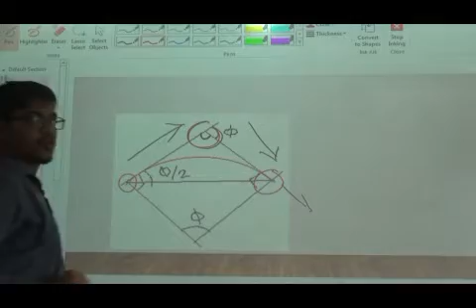Here we have some knowledge about the curve, some terms. Where these two lines meet, this point, I will change the color, this point is called the horizontal intersection. The starting point and the ending point of the curve are called tangent points. This is the starting point of the curve, this is the ending point of the curve. Both are called tangent points.

We were moving in this direction, and we diverted to this direction. How much we divert? This angle is called the deflection angle. We have to measure this with our theodolite instrument in the field, or, when we provide the curve, our design section will tell us how much this angle will be.

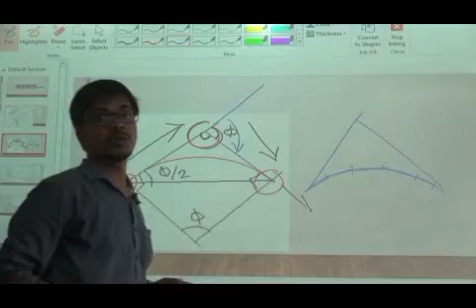Another thing we have to know is that when you provide a curve by the one theodolite, or Rankine's method, or the two theodolite method, the curve will be divided into many small chords like this. This is the smooth curve as per design, but in the field we have to provide various small chords, because when all the small chords are joined, that will be one full curve. So here we come to the first calculation.

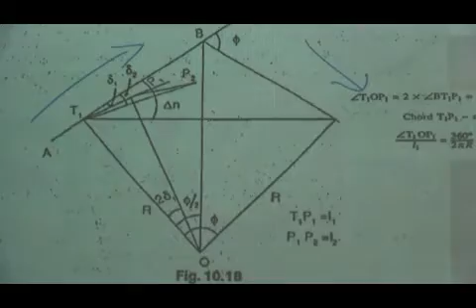We can see this is our first direction. We diverted because of some obstacle there, natural or human-made. How much we diverted? After that, we have to put one smooth curve there. But how to put it? Here comes the calculation. Another thing we have to know: we can see this picture. This is a quadrilateral, or Chaturbhuj.

If we draw this full circle, this is the center of the full circle. This one is the radius, and these two are tangents. Radius and tangent meet at a 90-degree angle, and this is a quadrilateral. The summation of the 4 interior angles is always 360 degrees, and these two are already 90, that means 180 degrees. So the summation of the remaining two angles is 180 degrees.

If we extend this line, this is a straight line. This angle is phi. So how much will this be? This will be 180 minus phi, and this angle is also phi. So this angle and this angle will be equal, as per the conclusion.

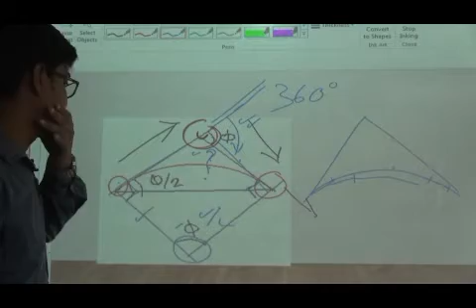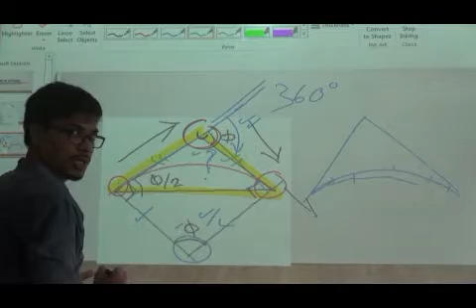And if we see this triangle, see, these are the tangents, and as per the property of the circle, we know that from one point both tangents are equal. From an outside point of the curve, these tangents are equal. So the lengths of these two tangents are equal, so both these angles will be equal, okay.

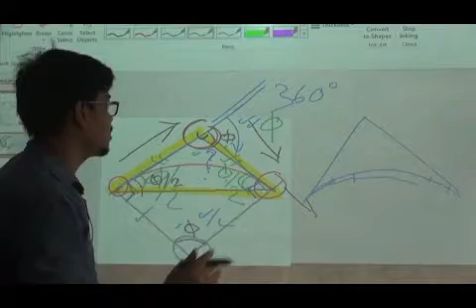And we know, as per the property of the triangle, the summation of this and this is equal to this angle. So if this angle is phi, both these angles will be phi by 2. This angle phi by 2, this angle phi by 2. And just before, we got the conclusion that this angle is equal, so this angle is also phi.

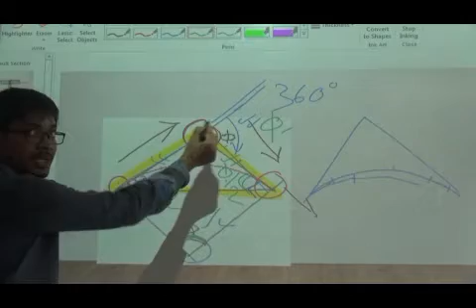So we can get the conclusion that whatever angle is made between the tangent and chord will be half of the angle made at the center, or reversely we can say that this angle is twice the angle made between the tangent and the long chord or any chord, okay.

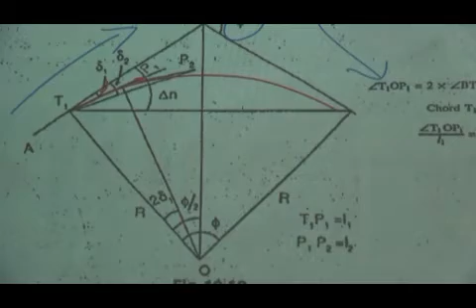So come here, suppose this one will be our curve, okay. This is the first point on the curve. We select the length L from here, and the first angle is delta 1. So how much angle will this chord make at the center? This will be 2 delta 1. So the chord makes an angle delta 1 with the tangent, and the same chord makes an angle at the center twice that, that means 2 delta, okay.

So from the circle we can say that the circumference of the circle is 2 pi r, that means the full circumference. And how much angle does this make at the center? This is 360 degrees. So if we zoom in on this chord and this arc, the difference in length between these two is very negligible. So we will assume that both distances are equal, okay.

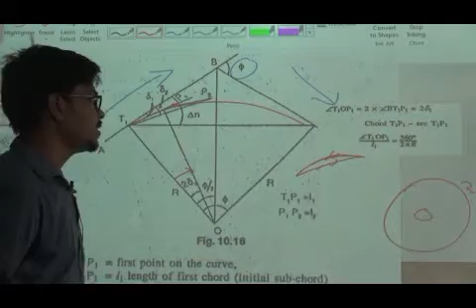So the ratio of the first chord or first arc, from here to the first point of the curve, to the angle made at the center, and the ratio of the full circle to the angle made at the center will be the same. So from here we can get the conclusion that angle TOP1 and L1, the length of the chord, equals 360 degrees divided by 2 pi r. This is the ratio, and these both are equal.

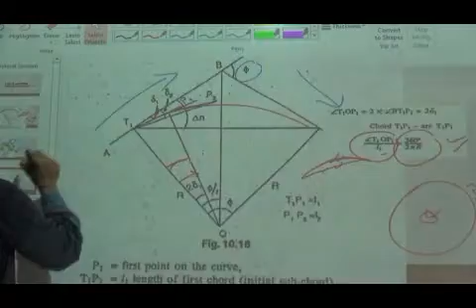So from the equation we get this one. This one is 2 delta, so we will put the value here. 2 delta, and actually this one is L. 2 delta, that means the 2 delta angle made at the center, and the length of the chord equals 360 divided by 2 pi r.

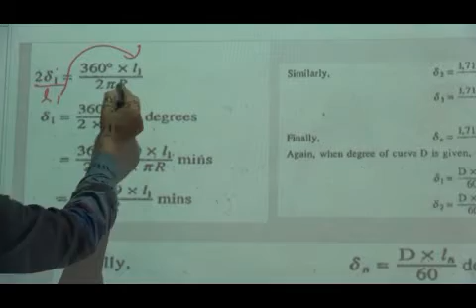It goes upside, and it will multiply, and the remaining part 2 pi r goes downside. So the value of delta comes like this: 360 degrees multiplied by L1, divided by 2 multiplied by 2 pi r. So if you put the values of 2 pi and 360 degrees, the value will come. Sorry, one thing, that value will come in degrees.

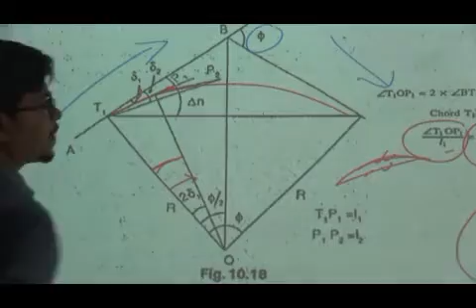But as we can see, the angle is very small, so sometimes it may not come in degrees. So we will calculate this angle in minutes. If this value comes in degrees and we multiply by 60, because 60 minutes equal 1 degree, the unit of the value will become minutes. So the actual value comes like this: 360 multiplied by 60 multiplied by L1, divided by 2 multiplied by 2 pi r.

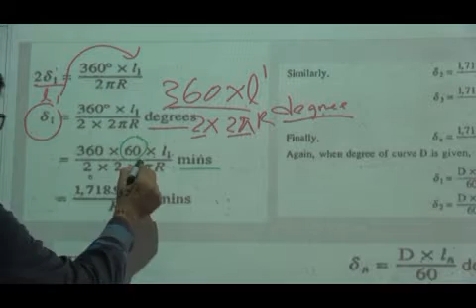So if we calculate this value, it comes to 1718.9, or 19, no issue, times L1 divided by r. This is the main formula. We will use this formula for calculating the remaining deflection angles. Another thing, we have to check whether the calculation is correct or not.

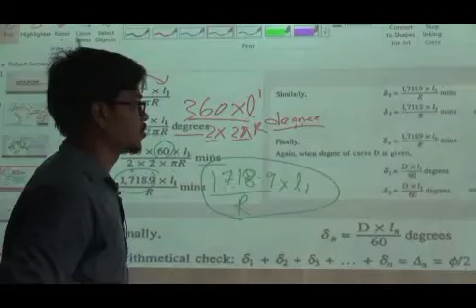How? Just look at the picture. We have to provide multiple chords. First delta 1, then delta 2, then delta 3, like this, until we achieve the end of the curve.

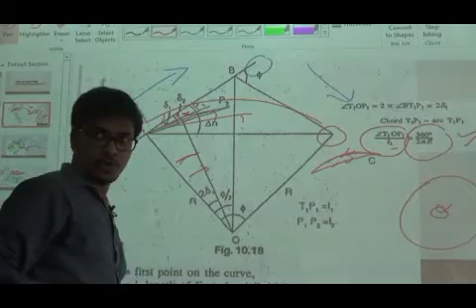After that, the actual total summation of angle, what we get? We get this whole angle. Okay. So how much this will be? This is the half of the angle. We already got the conclusion, this angle is half of the deflection angle. So this whole angle is half of the deflection angle.

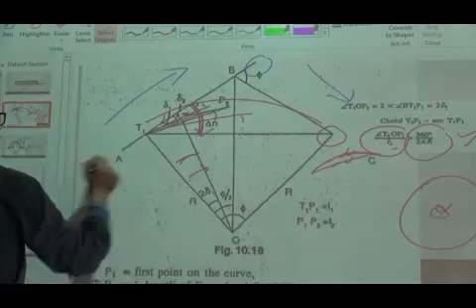So if we sum all these deltas like this, if we add all these deltas, we will get this whole angle. Okay, and this is our phi/2. So we have to check all these deltas. We have to check after the calculation whether this is coming or not. If delta 1, delta 2 up to delta n, if it becomes phi/2, then our calculation is correct.

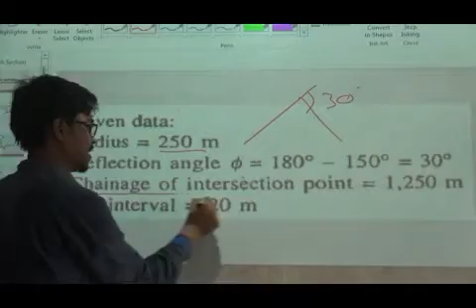Okay. Suppose we discuss one example to easily understand. We have some data. The radius of the curve is 250 meter, deflection angle 30 degree. That means this angle is 30 degree. The radius of the curve 250, and chainage of intersection point 1250 meter. That means chainage of this point is 1250 meter. And full peg interval is 20 meter. We will calculate the whole calculation.

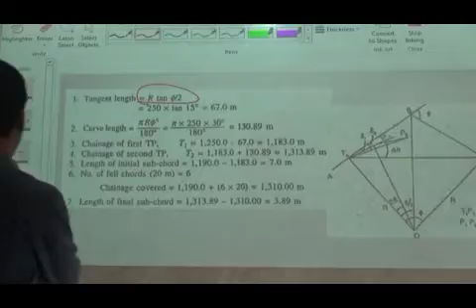Okay, we know the formula to calculate the tangent length, this one from here to here. The formula is R tan phi by 2. From the data, R equal to 250 meter, and phi equal to 30 degree. So we put the value 250 tan phi by 2, that means 15 degrees, and it comes 67 meter.

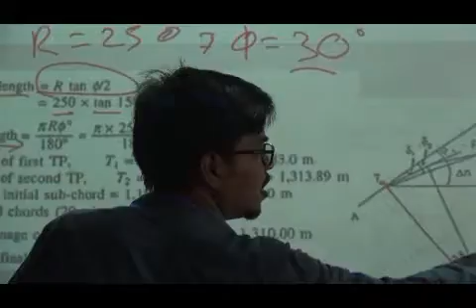So from here to here length is 67 meter. And the length of the curve from here to here, the formula is pi R phi by 180. We know the value of radius, that is 250 meter, and the value of phi, that is 30 degree, and we get the value 130.89 meter. This is the length of the curve.

Okay, so why do we calculate this value? When we are making an alignment, we will calculate through the chainage. We have to set up everything in mind. We will work throughout with the chainage, because when we work with a project, we work with the chainage. So as per data, the chainage of this point is 1250.

So this is our increasing chainage direction, but when we come this direction, this will be negative. If this one is 1250, what is the chainage of this point? From here we have to subtract the tangent length. So we get the chainage of the first tangent point, T1: 1250 minus 67, the length of this tangent, equal to 1183. So the chainage of T1, the starting point of the curve, is 1183.

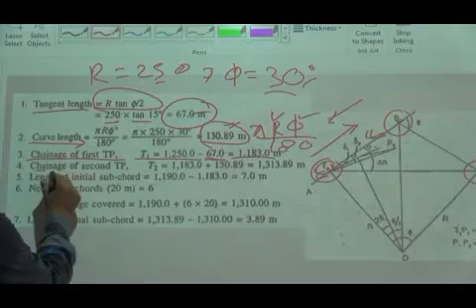And how will we get the chainage of T2? First our direction was this, but when we divert, we have to provide the curve. Our new element is the curve. So the chainage of the last point of the curve, T2, is the chainage of the first point of the curve plus the length of the curve. That is 1313.89. So chainage of the last point is 1313.89 and chainage of the first point is 1183.

So now as per data, we have to provide 20 meter interval. We will not start the 20 meter interval from this starting point, because this value cannot be divided by 20. So we have to go to a round figure ending in 0, because 20 has the 0 at the end.

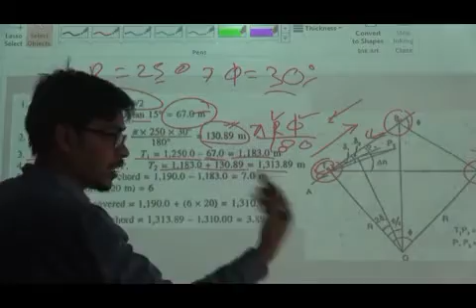So we will go to the first chainage value that has 0 at the end. So 1183; if we see, after 1183 the value 1190 is the first chainage value that has 0 at the end. So we will start our every 20 meter interval after the chainage of 1190. Okay, so 1183, after that the value is 1190. From here, 1190, we will start our 20 meter interval.

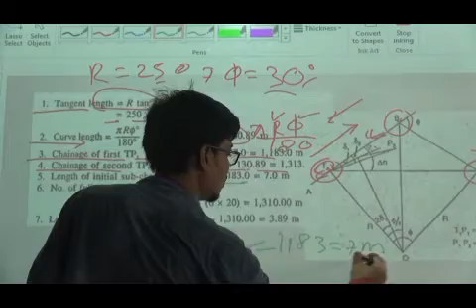So there will be one small chord from 1183 to 1190. So how much will it be? From 1183, it will be 7 meter. Okay, so there is a small chord at the start of the every 20 meter interval; this will be 7 meter. This is called our initial subchord. The length of the initial subchord is 1190 minus 1183, which is 7 meter. After that we will provide our 20 meter interval pegs.

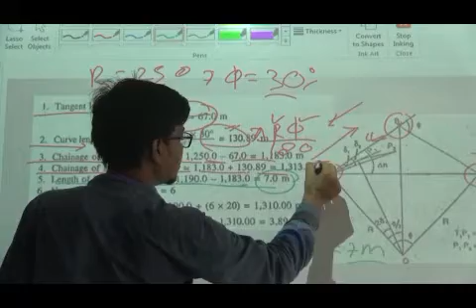Okay, and we can see our last chainage, that means the end of the curve, is 1313.89. This is the chainage 1313.89, the last chainage. If we put a peg every 20 meter interval, we cannot reach 1313.89. We have to find the chainage before it that has 0 at the end, because 20 has 0 at the end. So this one is 1310.

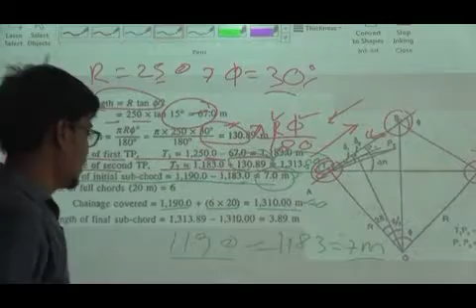We will go through the 20 meter interval and the last peg will be at the chainage of 1310. So how much will it be? Six 20 meter full chords, and we will achieve the last point of the 20 meter interval, that is 1310. And another small chord would be remaining at the end. How much will that be? The chainage is 1313.89. If we draw the picture, every 20 meter interval we get and we just achieve this point, but the remaining part, how much is this one?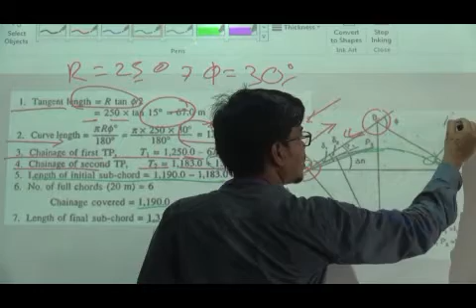This chainage is 1310, and that is 1313.89.

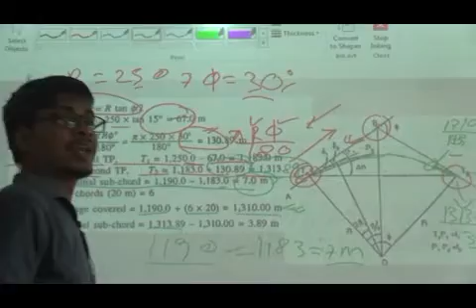The chainage of this point is 1313.89. So how much will this length be? 1313.89 minus 1310, that means 3.89. This is the last or final subchord. The length of the final subchord is 1313.89 minus 1310, that is 3.89. So we got the chords: one initial subchord of 7 meter, full chords of 20 meter, and the number of full chords is 6, and the last or final subchord is 3.89.

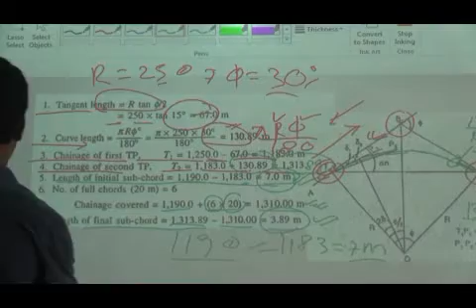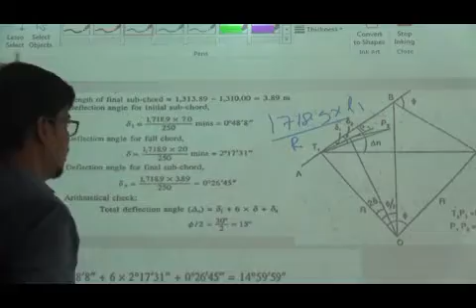Okay, so coming to the part of the calculation. The formula was 1718.9 multiplied by L by R. So first, L1 is how much? It is 7 meter, the first initial subchord. 1718.9 multiplied by 7 meter, and the radius of the curve is 250 meter. We got the value 0 degree 48 minute 8 second.

Okay, and all our remaining full chords are 20 meter. The number of chords we know is 6, so 1718.9 multiplied by 20 meter divided by 250 meter. We put the value and got the angular value 2 degree 17 minute 31 second. That is the angular value for the remaining 6 full chords. As the chord length is the same, all 6 deflection angles will be the same.

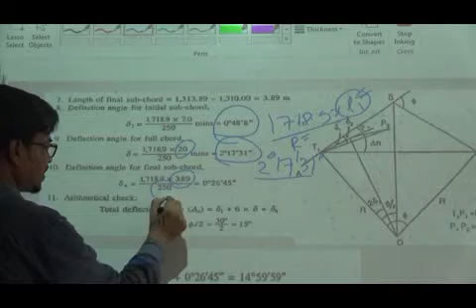And the last part of the curve, the final subchord, has the value 3.89. So we put the value 1718.9 times 3.89 divided by the radius, 250 meter, and we got the value 0 degree 26 minute 45 second. So now we have to check arithmetically, as I already told before, whether this comes to phi by 2, the deflection angle. If it comes to phi by 2, then our calculation is okay.

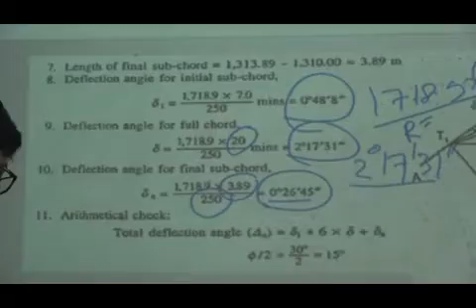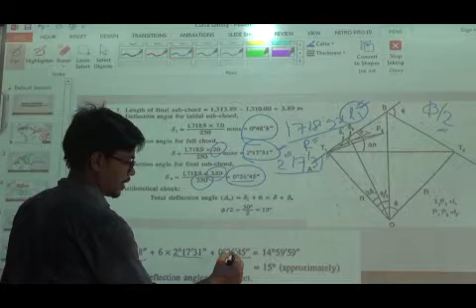Okay, let's see. The first deflection angle is 0 degree 48 minute 8 second, and the number of full chords was 6, so the number of deflection angles will also be 6. So 6 multiplied by 2 degree 17 minute 31 second, the deflection angle of the remaining full chords, and for the final subchord the deflection angle is 26 minute 45 second. So if we add 48 minute 8 second, 6 times 2 degree 17 minute 31 second, and the deflection angle for the final subchord, we get the value 14 degree 59 minute 59 second.

But our phi, the value of phi was 30 degrees, so phi by 2 equals 15 degrees. So this and this value are approximately the same. We got the value 1 second less because we calculated with a round figure. After that maybe some fraction was there, we neglected this. So our value comes like this, 14 degrees 59 minutes 59 seconds. This is almost 15 degrees. So our calculation is correct.

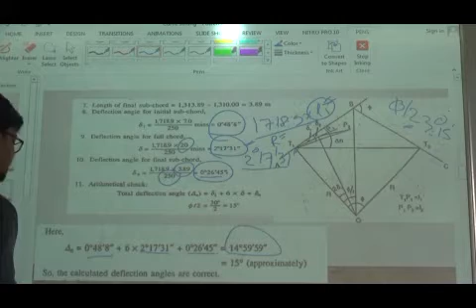Okay. So this is the part of the calculation. We have to make one table. For the field procedure, our calculation is almost ready, but for the field procedure, we have to make one table. So what will be the table? I'll zoom this. Okay. The table is first, in the first row, this is the point. What point will we provide on the curve?

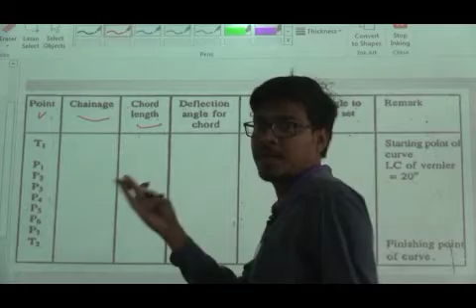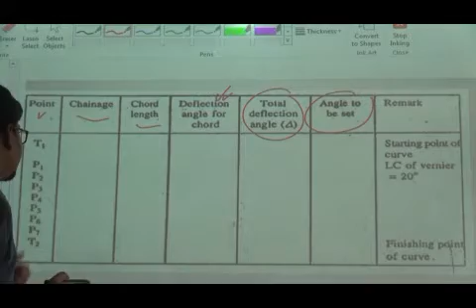The chainage of every point, the chord length, that means 7 meters, every 20 meters, and the last remaining length of the final subchord. Deflection angle for every subchord, that means this one, deflection angle, this one, we calculated the value here. Okay. And this is total deflection angle and angle to be set. I will discuss about this. We have to fill up the table this way for the purpose of the work.

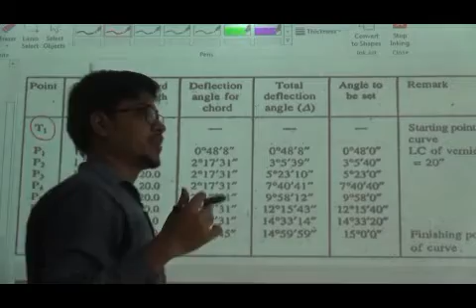What was our first chainage of the starting point? That was 1183. We already calculated it from the tangent point and from the chainage of the intersection point. That is the first point of the curve, 1183. After that, we assume our first point of the curve where we started the full chord, that is 1190, that is a round figure, and after that we add 20 meters, 20 meters, 20 meters.

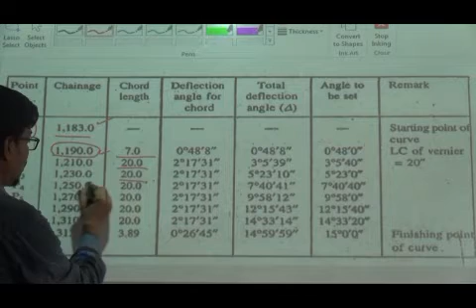You can see first from here, how much chord? 7 meter initial subchord, and every 20 meters we add and the chainage also increases every 20 meters, and we achieve the last full chord. The point of the last full chord is at chainage 1310, and after that the remaining final subchord is 3.89 meters. So we just add every 20 meters and we got the chainage. And those are the points on the curve.

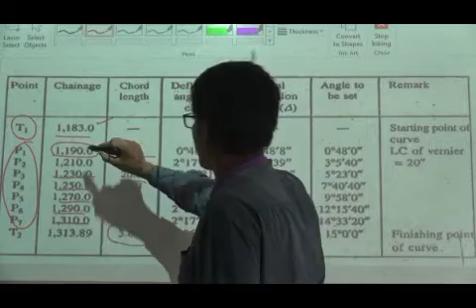So for the 7 meter initial subchord, we already calculated the value. The deflection angle is 48 minutes. We already calculated all these angles for the 20 meter intervals, and for the final subchord, we got the deflection angle 26 minutes 45 seconds.

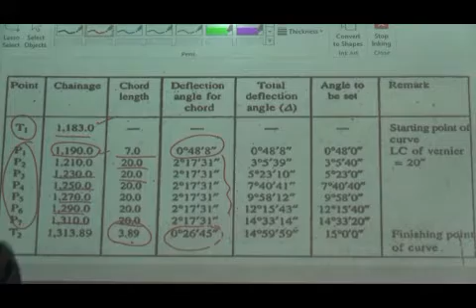So what is now the total deflection angle? If we see the picture, I will just show you. Just watch the picture. From here we got first delta 1. Then again from here we deflect this angle. If this one is delta 1, this one is delta 2. So how much do we total deflect? Delta 1 and delta 2. And after that delta 3. So total is delta 1 plus delta 2 plus delta 3. So this is the total deflection angle.

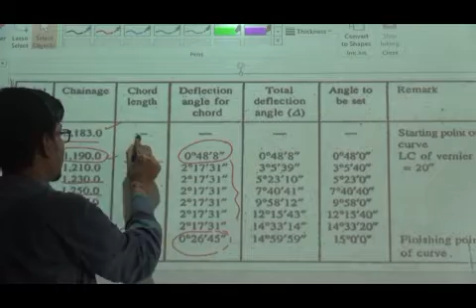Our first deflection angle is 48 minutes 8 seconds. We can see at the first point there is no deflection angle, because this is the starting point of the curve, T1. For the 7 meter initial subchord, our deflection angle is 48 minutes, and this is the first deflection angle.

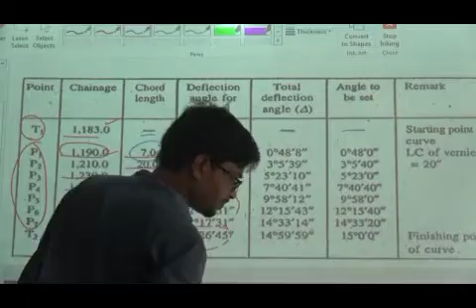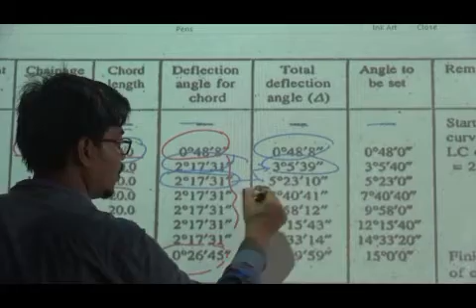And after that, the second deflection angle for the 20 meter full chord is 2 degrees 17 minutes 31 seconds, and we just multiply this value and this value and we got this one. After that we just add this value to this value and we got this. This is delta 1 plus delta 2, delta 3, delta 4, and we got the total deflection angle, that is 14 degrees 59 minutes 59 seconds.

Okay. So now we will use our vernier theodolite in the field. As we know, the least count of the vernier theodolite is 20 seconds. Okay.

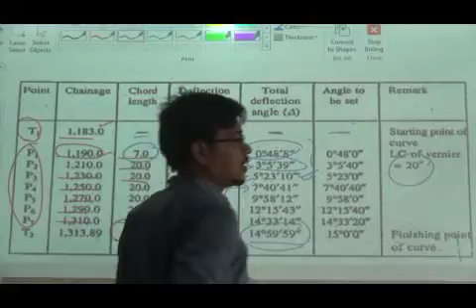But we can see our value comes like 39 second 41 second, 43 second, but our least count is 20 seconds. So how we'll set up? We have to make this figure in round figure. How? Like this.

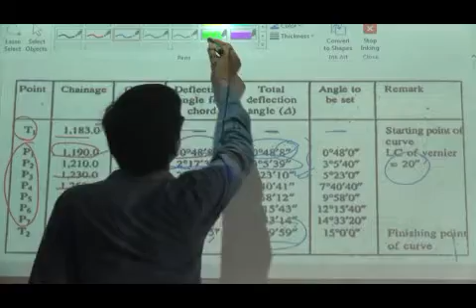We have to assume our last value was 8 seconds, but we have to make this value to 0 second, 20 second, or 40 second. So if we go from 8 second to 20 second, we have to add 12 second, or if we come to 0 second, we have to minus 8 second. So what will be nearest to 20 second?

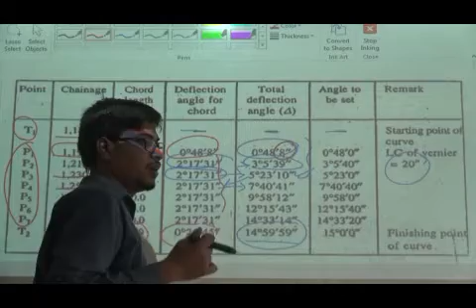We just plus or minus. So from here we can see, obviously if we minus 8 second, that will be 0 second, it will be less than 12 second. So the value for the angle to be set for the theodolite will become 48 minute 0 second, because 0 second is nearest to the 8 rather than the 20 second.

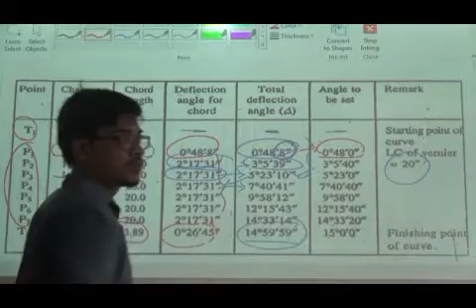And another we can see 3 degree 5 minute 39 second. Obviously 39 seconds is nearest to the 40 second rather than the 20 second. So we will assume the value is 40 second.

Same, both this one is 41 second. Obviously, between 20 and 60, 40 is the nearest to the 41 second. So we will assume the value is 40 second.

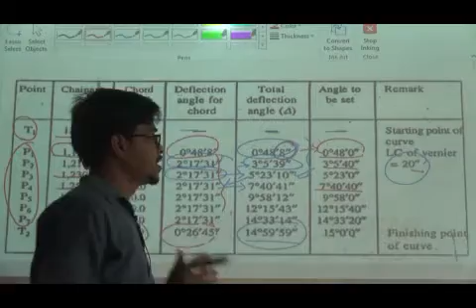So whole the value we just assume as multiple of 20 second, because we have to set in 20 second or 40 second or 60 second as per the theodolite. So we got the angle to be set, this whole value, and this chord we will use in the field. So now come to the field.

So up to this point the calculation for both procedures, that means one theodolite deflection angle method and two theodolite method, the calculation part is the same. Now come to the field procedure. Field procedure is a little bit different.

Now first come to the one theodolite method. As per the name, we will use one theodolite instrument for this method. How it will be used, we can see the picture, and I will draw also.

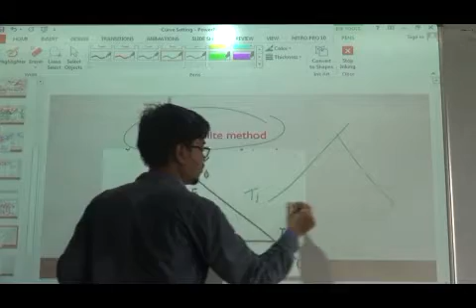Suppose this one is T1, this one is the end point of the curve, this deflection angle we already measured. First we have to set up our instrument here, that means theodolite instrument set up here. We have to set 0, vernier and main scale 0 towards this direction.

Then we clamp up our main scale and open our vernier scale, and we put the value, the angle to be set, we put the value first, this value we set up in this theodolite. So first we set 0 in this direction, we put the value, and we got the angle.

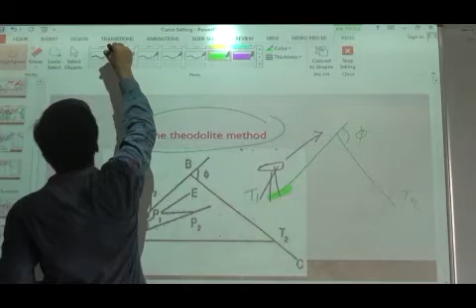We got the angle delta 1. And the first length, what was the first length? As per table we can see the first length of the first chord is 7 meter.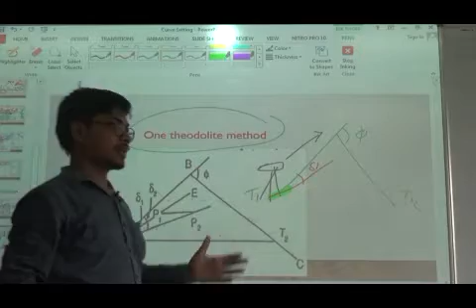So we have to measure, just put the angle delta 1, and one man should be here on the line in zigzag way, and the theodolite man will direct the man to go left side or right side, and it will come in line one time, and from here we have to measure the length, that is 7 meter. So we get the first point on the curve.

As we can see in the picture, from here we set up instrument and we just measure the value of delta 1 and measure the point. This one is 7 meter, and we got the first point of the curve.

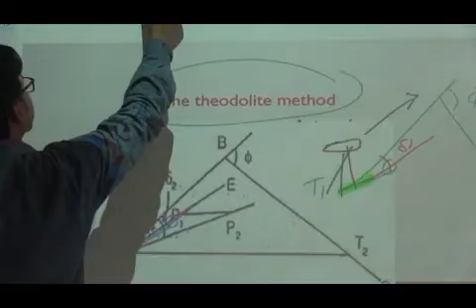So this angle will be set again, that means this angle from here, this angle to be set, we have to set, and the number of full chords already started from here.

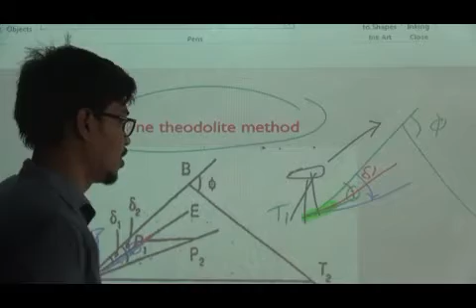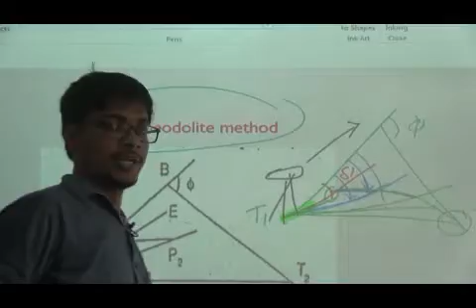This value I will mark in different color. This value is the second point of the second chord, that is full chord. Now after that again we have to set up the theodolite angle this way, and our value will be 20 meters. After that we achieve the end of the curve, and it will close at T2.

We have to measure this angle from here, and we have to measure from the end of the last chord. So we come at the end, and at the end we will meet T2, and at all the points we will put one peg and join them. Here we get points like P1, P2, and again P3, P4. If we add all the points, we get our curve. So that is the first field procedure.

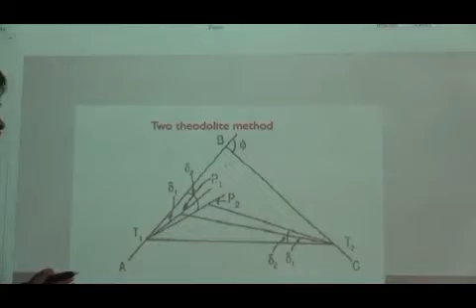Another process is the two-theodolite method. The calculation, as I already told you, is the same, but the field procedure is different. So as per the name, we have to use two theodolite instruments. One theodolite will be set up there, one theodolite will be set up there.

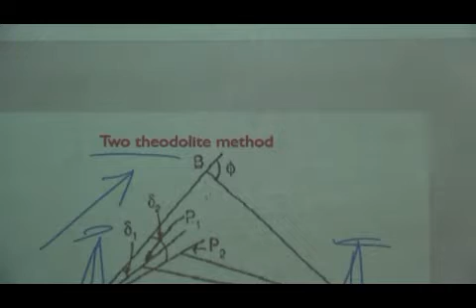From here, this theodolite, as in the one theodolite method, we have to set 0 in this direction, but this theodolite we will set the 0 at this direction. That means from here, from the last point of the tangent, from the end point of the curve, the instrument will be set up, and 0 will be set at the first point of the curve. In this direction the instrument will be 0 set, and first, as per the one theodolite method, the instrument is set up at the first point of the curve, that is set up 0 at the intersection point.

So as per this, we just set up 0, main scale, vernier scale 0, we put one flag there, we set up 0, and after that we measure delta 1, we get the line. After this, I will change the color. From this we set up 0 here. We will also go in the same clockwise direction. We set up the first delta 1, the first angle for the initial subchord, and we get delta 1.

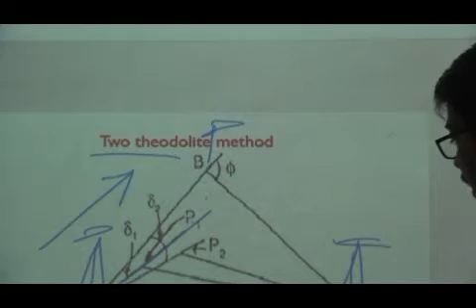If we extend this line and extend this line, both lines will meet up at one point, that is the first point of the curve. Now how is it possible to find this point in the field?

First point, from here one man will direct the man with a ranging rod, it will just come in the line, maybe here is the line, and when this instrument operator sees this man, he will see him on the right side of his alignment, because this is his line, right side of this man standing over there. So watching from his right side, he will direct the man to come to the left side, and again he will operate if the man goes out from the alignment.

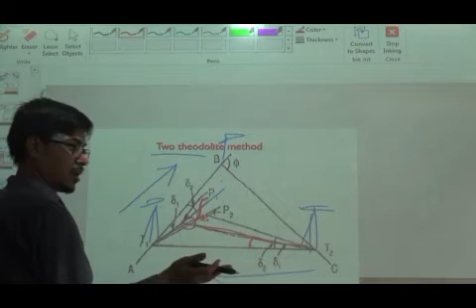So after that, in this line, if he comes like this, eventually he will meet particularly at this point, and this is the common point that we can see from here also, from both alignments, and this is the first point on the curve.

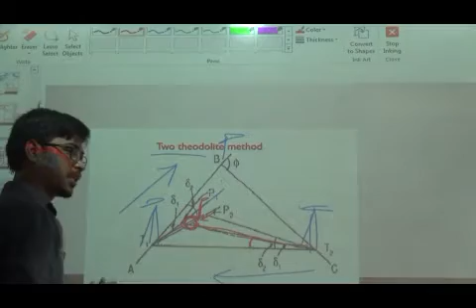The same process we will repeat like this with the instrument here. First delta 1 already done, and after that we will set delta 2, that means this angle we will set up, and we will set up delta 2 from there. Delta 2 is done, and this point is the common point, the second point on the curve, that means P2.

Okay, so that is the both field procedure and the basic difference of the deflection angle method, 1 theodolite and 2 theodolite. Now comes the drawing. How the drawing sheet will be. As per the field procedure, our drawing sheet also almost will be same.

The drawing will be made in half sheet, one half of the one A1 sheet. So now the part of the drawing is easy. We know here will be nameplate, here will be some small margin, we already know.

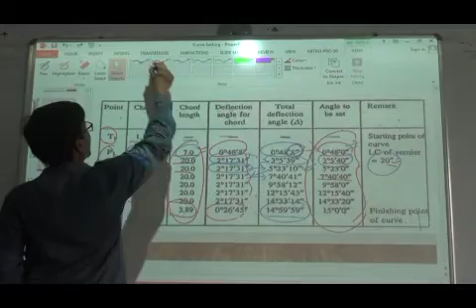Here we have to show the calculation. What is the part of the calculation? We don't need to show this. In the part of the calculation, we don't need to show this. We only just have to put this one.

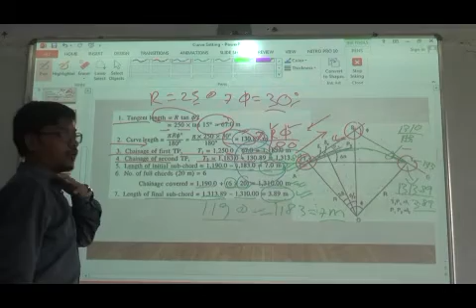We have to put only this one, and the calculation of the tangent, calculation of the chainage, and all the curve length, all the calculation we have to put there. All the part of the calculation we have to put there.

So that is the part of the calculation. Here is the nameplate, and the drawing will be like this. This is the angle delta we measure in field. We have to put with this our drawing instrument, and from here we have to measure first angle, that is delta 1. Just extend this line and measure by scale this first length of the subchord, and this is the first point of the curve.

Again we have to measure this angle, that is second delta, and measure the length from here to the first point on the curve. Another, we have to measure this angle from here, and length of the both will have to measure simultaneously, from here to angle or from here to distance. Again from here to this angle we have to measure, and this will be our distance, that means chord length. So here we come to the last point, that is T2, T1.

So this is the drawing sheet. There is nothing, we have to choose our suitable scale as per our data. I will choose just for the example 1 is to 400. It will be less, I think it will be less for you. Maybe 1 is to 100 for you. So this is the part of the first 1 theodolite method, first drawing.

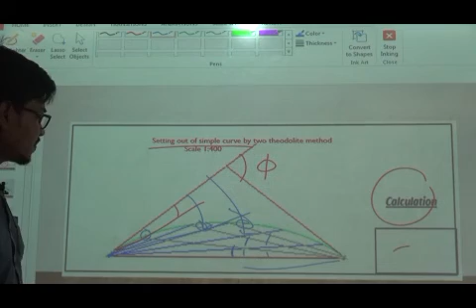Same, this is the third deflection angle on both sides, they are met at the same point. So these are the points on the curve. If we join all the points smooth, that will become one smooth curve. That is the basic difference between 2 theodolite method and 1 theodolite method, the field procedure is different, and the calculation for the both are the same.